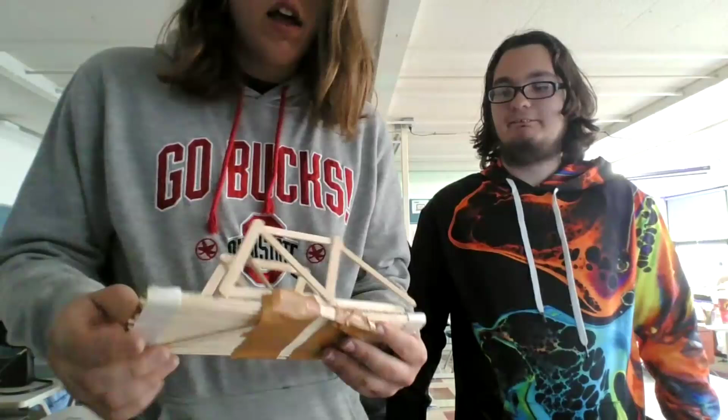We already did our testing with the weight. We held 45 pounds, and we couldn't fit any more books in our bucket, so we stopped it at 45 pounds. We couldn't fully test it, sadly. We used tape for our road on top of the popsicle sticks, and the hot glue came apart, which made it much less structurally sound for the heavier weights, but it still held up to 45 pounds, even though it wasn't fully structurally sound because half the hot glue started breaking.

That's an important point you mentioned, because that was brought up in the breakout room as well, and a lot of the failures end up happening at the joints or where you connected them. So it's important to always add a little more reinforcement in those areas. But good job, guys. Thank you so much.

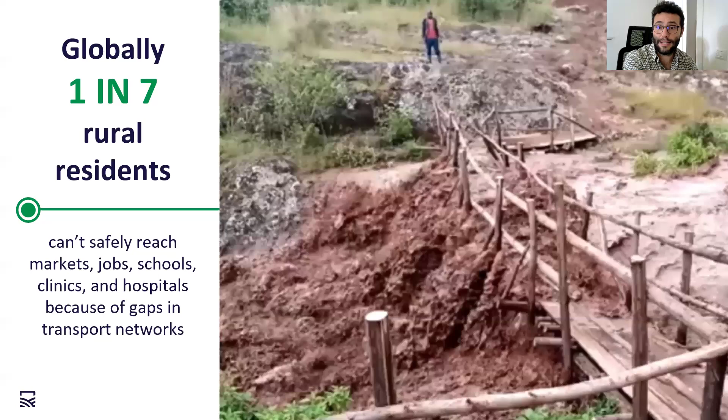And these are rivers that look like this when they flood. So they can really wash away anything that goes in their path.

And again, this is how 1 in 7 rural residents in the world are living. They're cut away from markets, jobs, schools, clinics, and hospitals because of the gaps in the transport networks.

So in Bridges to Prosperity, we have a vision. We envision what can be in the future, and we envision a world where the poverty that is caused by rural isolation no longer exists. And in order to reach that, we build bridges together with governments and these isolated communities in order to connect them to essential services like education, healthcare, and economic opportunities.

The ones that you can access on a daily basis without even thinking. And these people need to think if they want to risk their life or not, if a bridge is not there.

We have done this for a long time, more than 20 years, and connected more than 3 million people with more than 600 bridges. And we keep building. So it's an exciting, big mission. We want to connect millions of people to what they deserve.

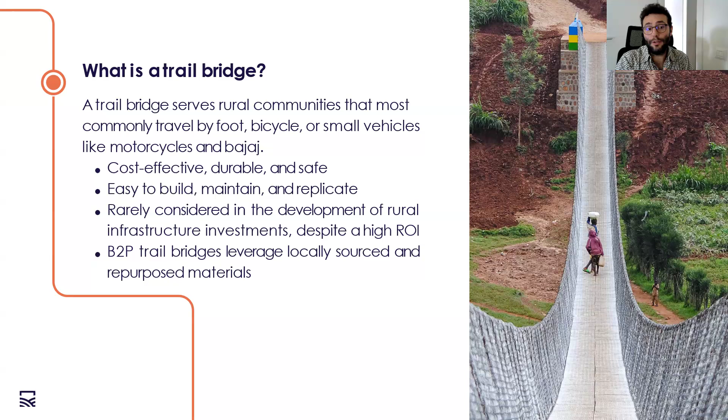We don't do it alone. These bridges are currently rarely considered, so we're bringing something new and explaining why it works. We also leverage locally sourced and repurposed material in order to build it, which is very, very cool.

Another way to describe them is that they are wire rope cable bridges. As you saw, they're specifically made with steel wire rope cables. Why did we decide on that design? Because they can reach long spans. We can make them long enough to stay away from the river path and not suffer from erosion of the banks. That's why we went with this type of design.

So we can build them very long because they are very light structures. Here are some examples of our standard type of bridges, which is the interesting engineering part.

This is a suspended bridge, what we call a suspended bridge. There are two big and heavy abutments at the sides of the bridge, made with rock and concrete, from which a walkway made with cables and a steel deck hangs in a hammock shape.

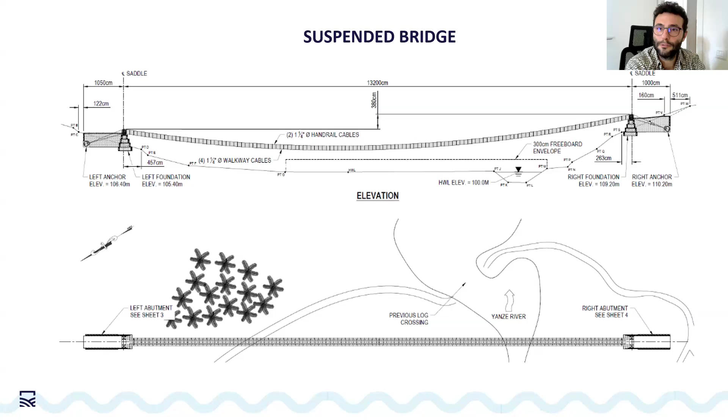You can see here the blueprint of the bridge, and how long they can be. This one is 132 meters long - I think that makes it probably 450 feet long. It's a very long bridge.

That's because the walkway part here on the right is very light, with only cables, fencing, and decking at the bottom. Then there's the part that gets all the weight, here in front - the foundation with some tiers.

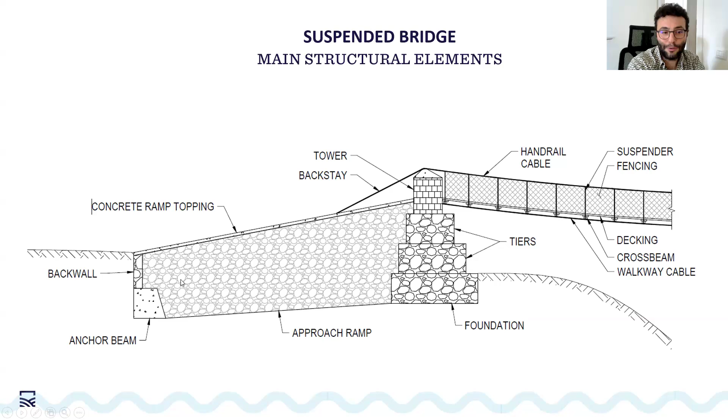So there are layers of foundations with a concrete tower on top. In the back, at the bottom, there's an anchor beam where the cables are connected. Finally, we build a ramp to connect the anchor to the foundation in front. That's more or less how this type of bridge works.

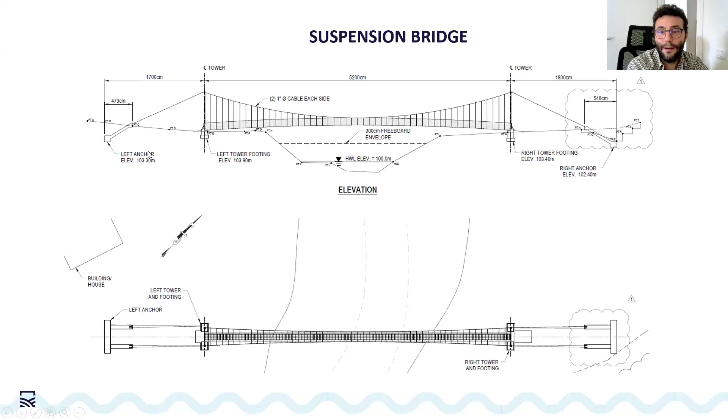This is the blueprint, and here are all the details. You see again the light walkway on the right, made in the same way, just with higher hanging cables in this case. Then there's a steel tower weighing on top of a concrete pedestal, on top of the footing, with a ramp to reach the level of the walkway. The cables go back to an anchor system.

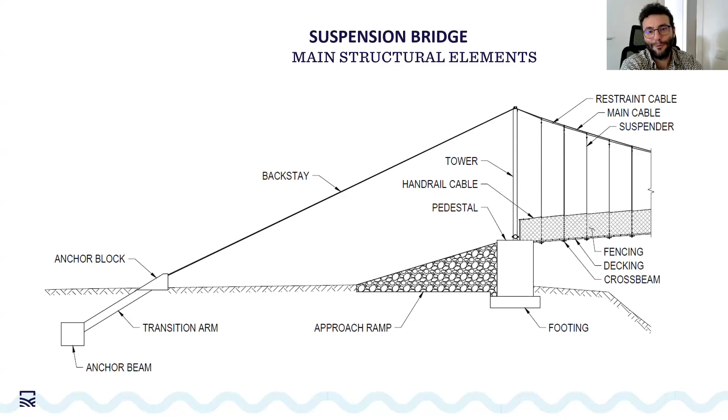That's what you saw earlier - it attaches to the block on top, but the force is transmitted through the arm down to the bottom, to this anchor beam. You can imagine it is long transversely, and it transmits the force that gets stuck down in the ground. So that's how these bridges work.

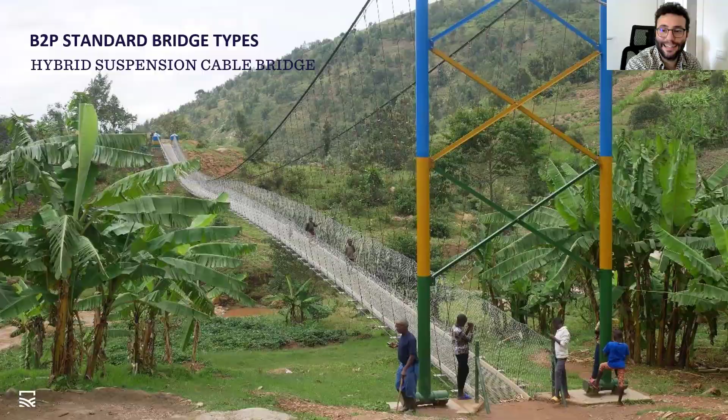We also found a very cool way to put the two types of bridge together, which is very exciting and engineeristic, because a lot of times we'd have topographies, valleys where one side of the river is much higher than the other, and neither of the other two types of bridge would fit. So we said, why don't we put a suspended abutment on the high part and a suspension tower at the bottom? And that's what we started doing, and we were able to build this funky looking but very efficient bridge.

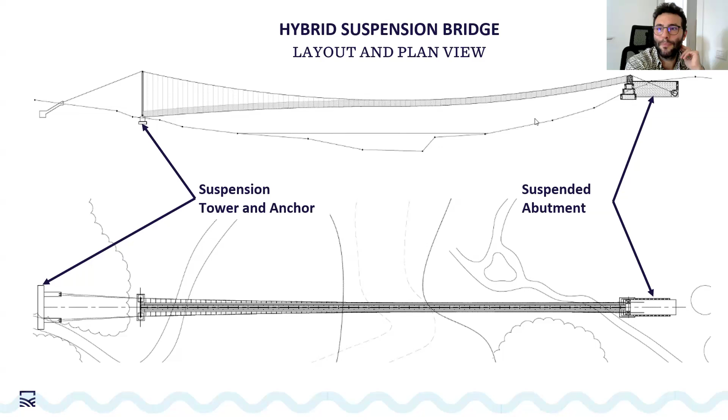And we have been able to build bridges where before we could not. So this was a major and very understandable engineering tweak that we found, and I'm really proud of it. Look at how funky it looks, but it's so, so good.

I wanted to briefly tell you also what happens - you saw the final product, but in order to reach that final product, you really need to pass through different steps.

The first one is to assess where the bridges are needed. For example, we did that in Rwanda in 2018, and we sent out a lot of assessors to check 1,500 sites. They came back with the information, and then we checked where we could actually build, and we found a list of more than 300 bridges that we could build.

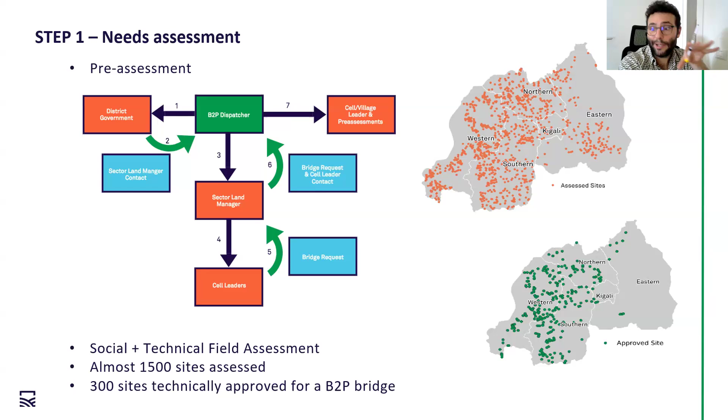So once we identify where we need and can build, then we send out our engineering team to do a survey. They use a topographic instrument called either an auto level or a total station. These instruments are able to identify points on the ground that can then recreate the profile of the valley on a computer.

So then you can decide how to design your bridge on a computer rather than on site. Once we have that information, we create the drawings, the design, and count how much material is needed for these bridges.

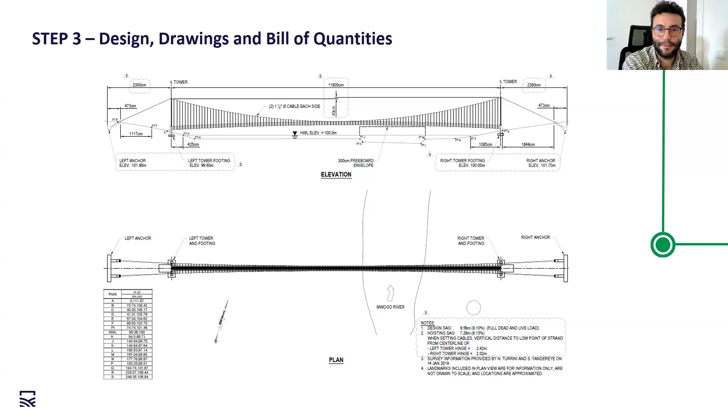So once we have the design, the drawings, and the quantities with the cost of this project, we sign a contract with the local government, which is always involved in paying part of these infrastructures. So we never just come and build - we always involve the local government, because they are going to be owning this public infrastructure.

And then we go to the community. We send our construction team that hires the local community and builds the bridge together, also with the government. So we involve the people that are going to be served by the bridge in building it. That's very beautiful.

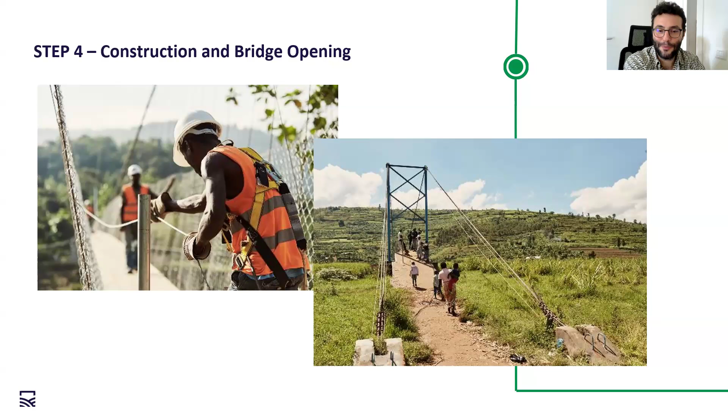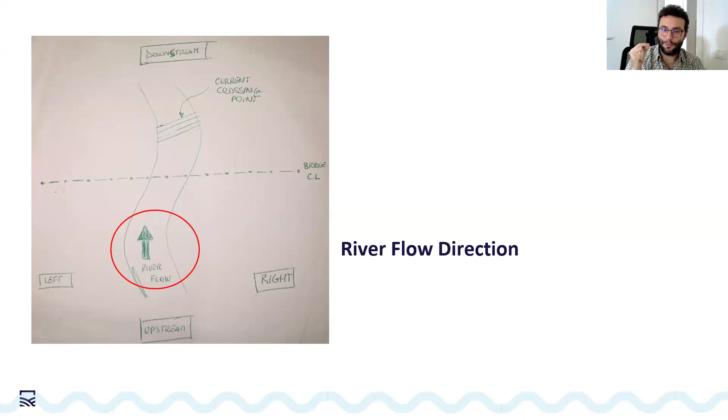Okay, now I'm going to tell you a little more about how we design them, and how we choose where to design them. I wanted to define some names: the river flow direction goes from one point to another, and that defines where the upstream is, where the water comes from.

The downstream is where the water goes to. The left is when you face the river direction and flow towards up in the drawing, and the right is consequently on the other side. Then there's the bridge center line - imagine if the bridge was just one line, that's where the center line would be. That's what the engineer needs to see when they go to the site when the bridge is not there; they see a line and decide where it is, and that line becomes the center of the bridge.

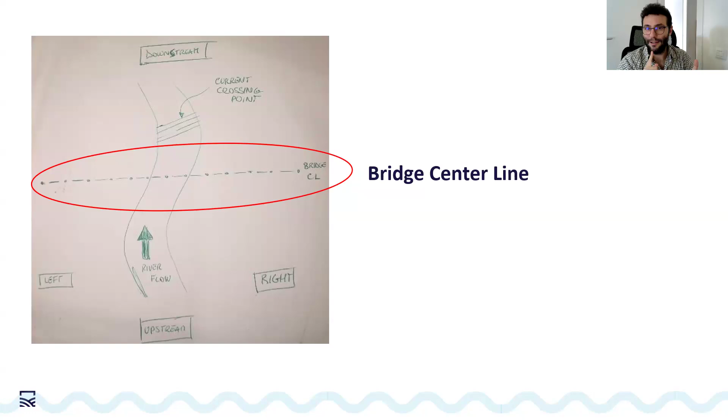So talking about this center line, we really want to always position it close to the crossing point.

So all of these communities will have a point of the river where they currently cross, one way or another, because they need to go on the other side. They will decide to risk their life to do it. Sometimes they walk on a log, and that log can be washed away by the river or fall in the water. It's very sketchy. Or sometimes they need to swim, and they risk drowning. In any way, they would cross somewhere, and so you want to put the new bridge close to that crossing point so these people can continue with the habit of crossing at that point.

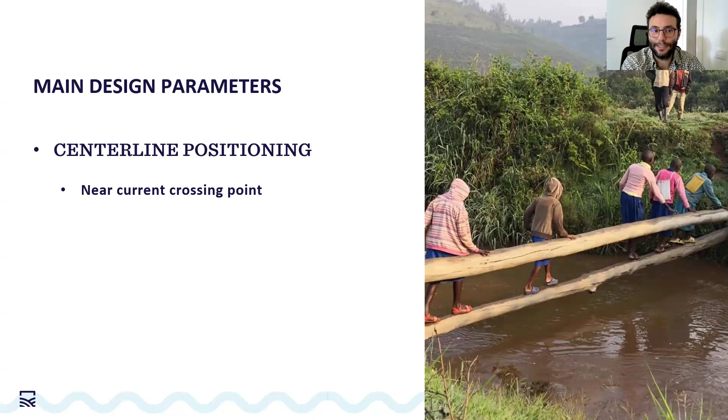Then when you go there, you need to find good places for the footings and the abutments, depending on what type of bridge you have, and that will define where the center line is going to be. So you imagine looking around and finding a place with enough space for the abutments and footings, and that defines how you choose the center line.

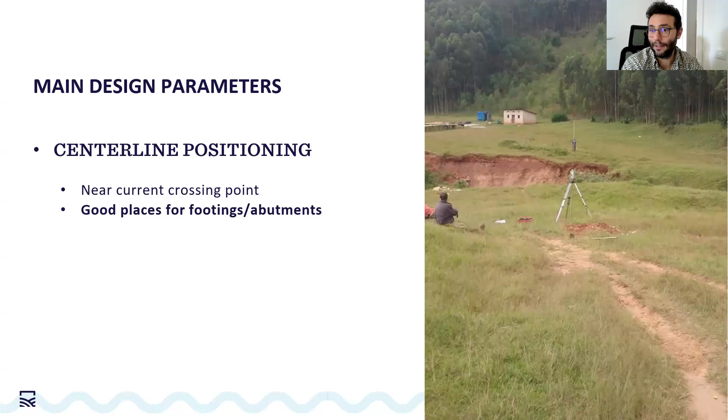Another thing that defines that is the quality of the soil. Because we work in very rural settings, all by hand, not with machinery, we just dig a pit and check with a visual assessment. We have very well-trained engineers who can assess if the soil is good. Why does the soil need to be good? Because the weight of the whole bridge is going to go on top of the soil. If the soil is bad, it will just crash and go down, and the bridge will start deforming and might even fall in the river. So it's really important to check that the soil is of good quality.

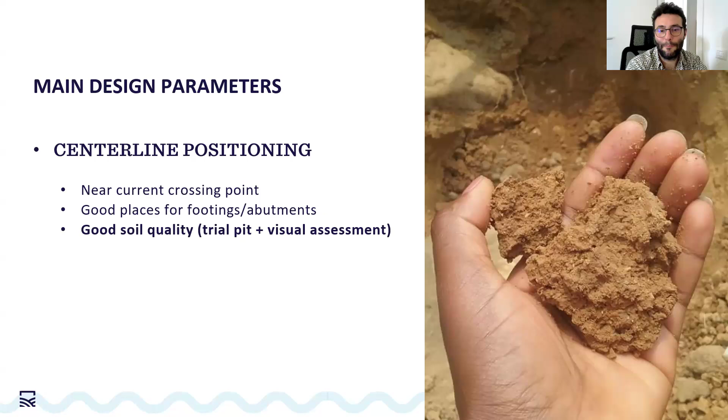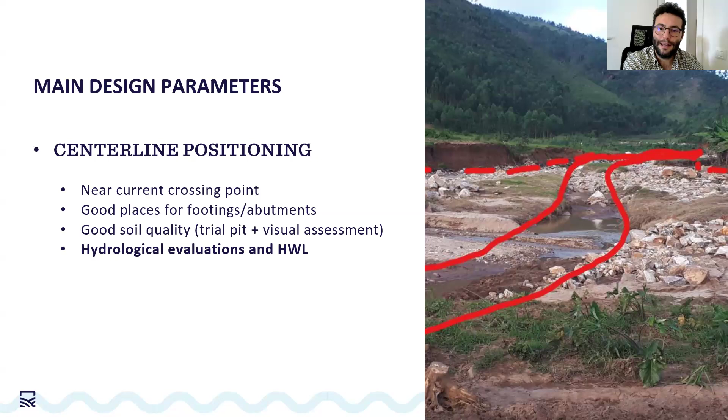We also need to understand the history of the river, because rivers are very difficult to understand, and there's a lot of engineering behind it. There's an entire section of hydrology in civil engineering schools that is very important and very complex. We need to study that, and how we do our hydrological evaluations is we start by looking at the banks.

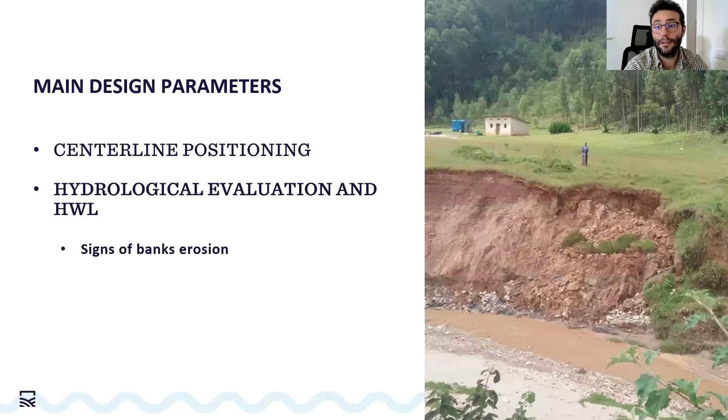The banks of the river may show a lot of signs of erosion, and in that case you need to be really careful, because you know this river is probably going to continue eroding this part and go beyond it. So you need to build this bridge carefully. If you build it on this center line, you're going to put the abutment very far away, because if not, one day it might fall in the river.

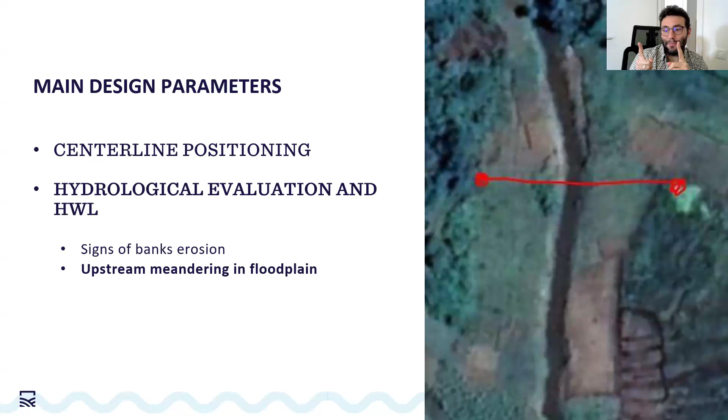Also with this in mind, when we look to build a bridge, we might think we need a 50 meter long bridge if we look just close to the position of the center line. But if we zoom out, you can imagine here is upstream, and there's a curve of the river that with the force of water can be eroded. If it's eroded too much, it can cut into the line of the bridge. So suddenly you need to build a longer bridge to consider that possibility, if you want the bridge to survive for decades, which is our goal.

What else? You need to avoid confluences where multiple rivers get together, because there's a lot of energy there, and the rivers jump here and there, up and down. You just never know what's going to happen there, so you don't want to build close to those areas.

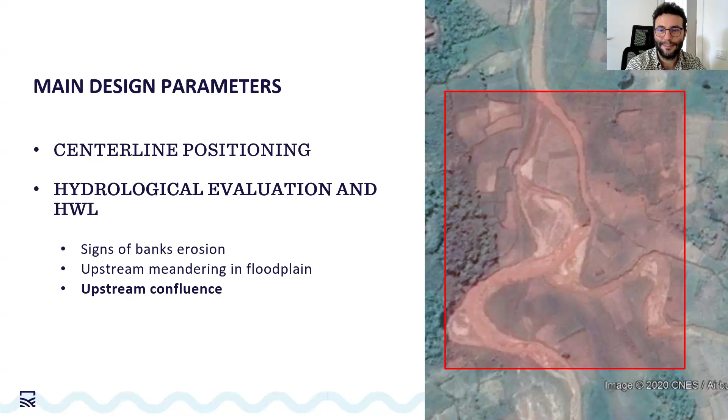Finally, you want to understand the high water line, which defines the highest level the water reached in the past. How do we do that? When you do a big bridge project, you actually do a full hydrological simulation and study, looking at all past information to guess with that information. But we don't have all of that. We are in very rural communities where rivers are smaller and nobody really has information. So what we do is ask the old people, the elders of the community, and they will know where the water reached back in the days of the biggest flooding they had.

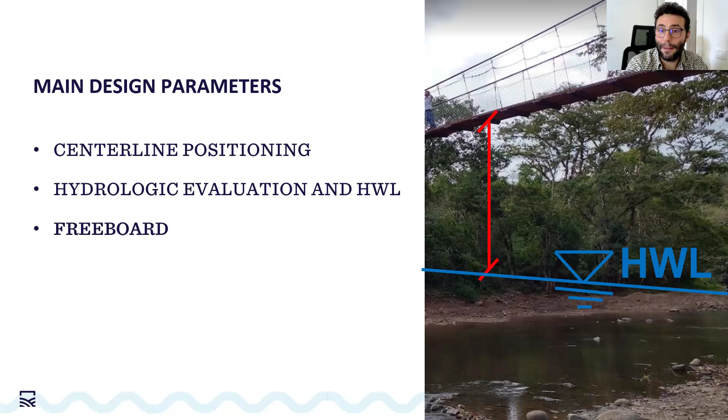And we can compare that information with what's around us and consider if it's good or not. On top of that, we want to also consider what we call a freeboard. We never put the deck of the walkway right on top of the high water line. We want to pull it up even more, because the water, when it floods, can bring a lot of debris with it, like trees and stuff, and they can get stuck and hit the bridge while passing through. Finally, we want to leave a lot of setbacks at the side in order to consider for possible erosion of the banks.

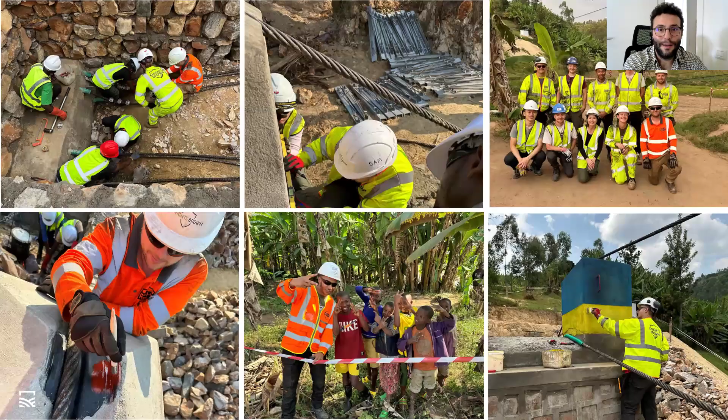In the first part, which I don't have photos of, sorry, there is a lot of excavation happening by hand, a lot of people excavating to build the foundations, the abutments or the footings. Once we have the abutments and footings in place, we start hanging these wire rope cables made with steel wires, all tangled like a braid. These are connected back to the anchor, as I showed you before. You see at the bottom in the top left, you can see the anchor. This is a concrete anchor that is cast at the bottom of the ramp I showed you before, and we connect the cable to that.

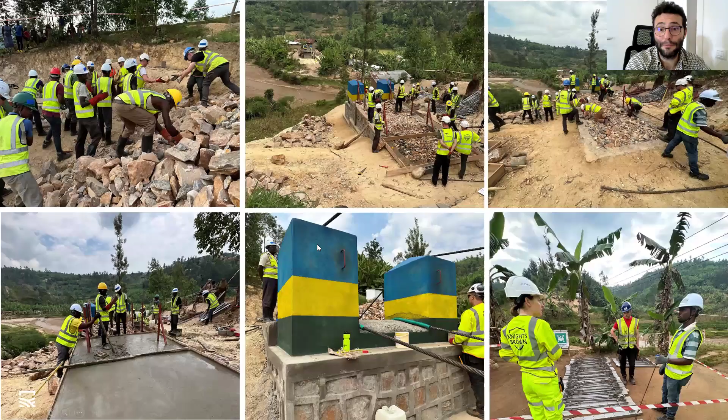Here you can see the swings that are going to be launched from each side. And this that the guy is painting, bottom right, is the concrete tower on top of the foundations. This is a suspended bridge, of course, I didn't say it. But you see there is a lot of rock moving to fill up the gap in the ramp once the cables are in place. You top it up, and then you finally close it with a concrete slab.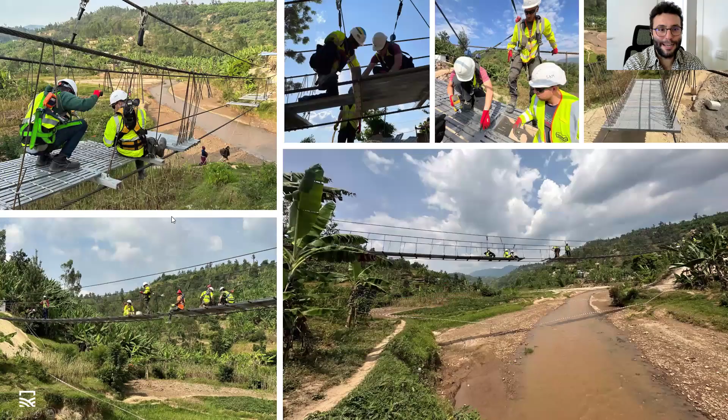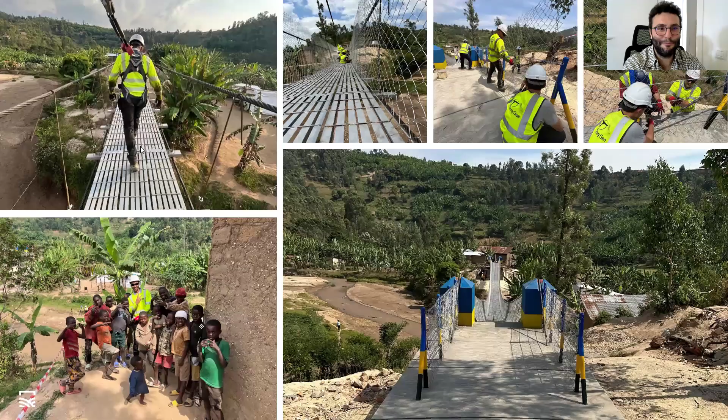All by hand. You can see there's no machinery, so it's a lot of hard work, let me tell you. Then once that is ready, we can start working at height and actually building step by step and panel by panel the walkway on top of these bridges. You can see you're hanging on top of the river, multiple meters above it. It's a pretty sketchy job, but it's also amazing, very satisfying. You can see there are two teams, one comes from the right side, one comes from the left side, and they're going to meet in the middle and close the gap.

From that time on, the walkway can be used, and it's amazing. Then you can put the fence on to close the gaps at the side, and have fun with all the kids that always surround us when we build bridges. Finally, you can inaugurate the bridge, which is a beautiful and stunning suspended bridge that is going to serve these communities. It is designed with big safety factors in order to last for multiple decades.

All to say, this is about providing safe access to normal people that want to go to normal places. This is what bridges do. Take a second and imagine how many bridges you are actually crossing every day, going to work, going to school, without even realizing. And what would you do if they were not there? Going to the market or to the hospital, and every hour.